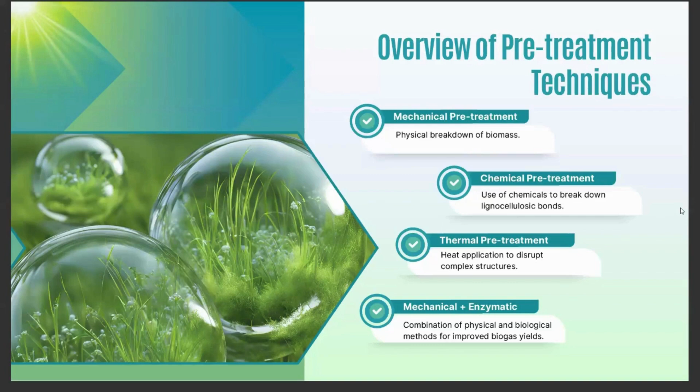For pre-treatment, there are multiple ways we can pre-treat Napier grass - one is mechanical, second is chemical, third is thermal. All these were already explained by the earlier co-panelists. Since I don't have much exposure to chemical and thermal treatment, I just follow mechanical pretreatment followed by enzymatic pretreatment. Today I will discuss only the mechanical and enzymatic treatment to save time for all the viewers and co-panelists. Please, next slide.

In mechanical treatment, we break down the size of the particles. So it is again clear that the lesser the particle size, the more the biogas production.

When we thought of pre-treatment of Napier grass, we looked at nature. We looked at how a cow can digest the grass, and we tried to copy it. We have not done something miraculous or invented something miraculous. We just looked at the cow and tried to copy how it digests grass or any agricultural waste. What the cow does is, we all know cows have multi-gastric stomachs.

When it grazes in the farming land, it chews in very big sizes and tries to finish its meal in very little time, keeping it in one compartment of its stomach. When it comes back to the resting period in the farm, it recalls it, chews it into fine particles, and at the same time mixes in saliva, which is nothing but a natural enzyme that can digest the Napier grass. This is the same thing we followed here to digest the Napier grass.

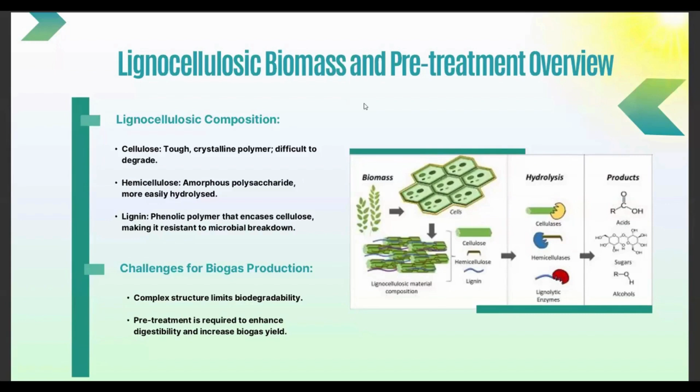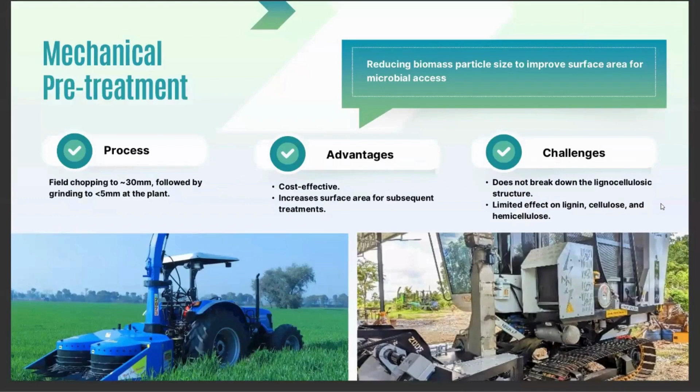These are the mechanical equipments we have invented over the period of time in India. This one is the first one, invented at our factory in Punjab. The second one is what we are importing from Thailand, for initial days only 5 pieces, and the rest can be manufactured here in India with their collaboration to bring down the imported cost. So the process is field chopping to less than 30 mm size.

Then at the CBG plant, a second milling brings the biomass down to less than 5 mm size. The advantage is it is a very cost-effective solution, and it increases the surface area for the subsequent treatment of enzyme and the bacterial consortium.

There are certain challenges. The mechanical treatment does not break down the lignocellulosic structure of the biomass; that needs to be taken care of by adding the enzymes. There is limited effect on lignin, cellulose, and hemicellulose. So mechanical treatment is not for treating lignin, cellulose, or hemicellulose, that's what I meant.

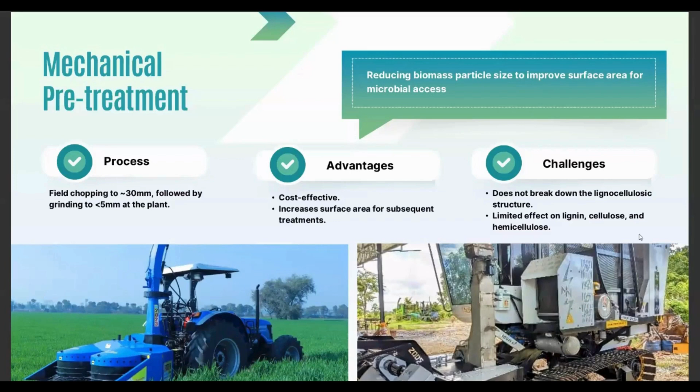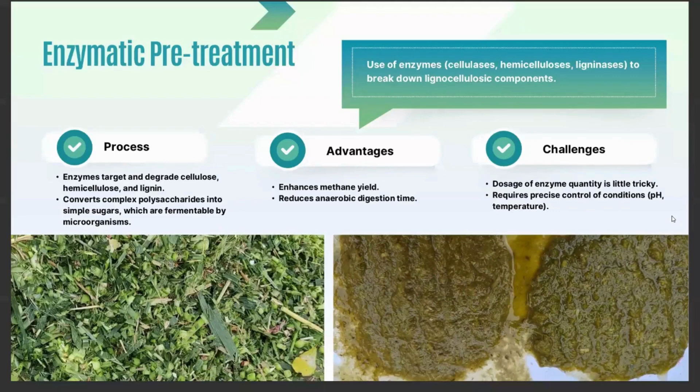In the first picture on the left hand side, you can see what we bring or do at the farm level. The particle size is chopped at the farm level using the mechanical equipment shown in the last slide, from 1 to 30 mm size. Then when we bring it to the CBG plant, shown in the extreme right side slide.

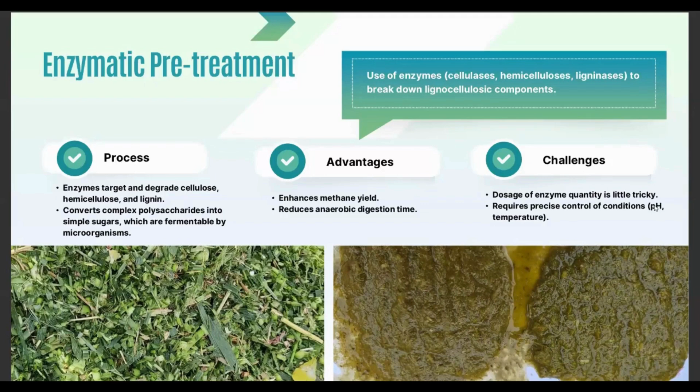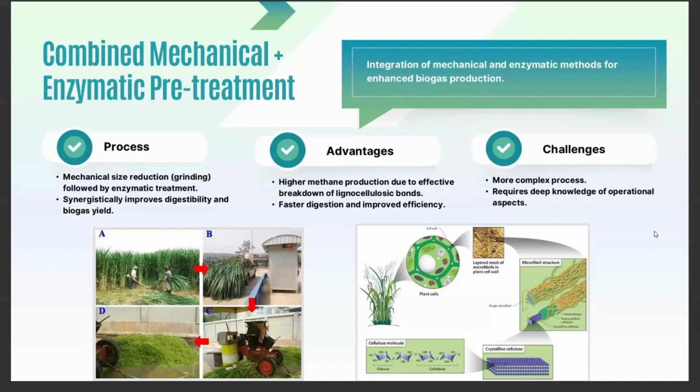The advantages and challenges I also discussed in the last slide. Next, please.

So here I explain the detailed process flow. Step one is mechanical chopping of Napier grass in the field up to 30 mm size. Second stage is to transport that chopped grass to the processing facility, meaning the CBG plant. Third step is the second mechanical treatment, meaning grinding or milling it to bring the size down to less than 5 mm, which increases the surface area exponentially.

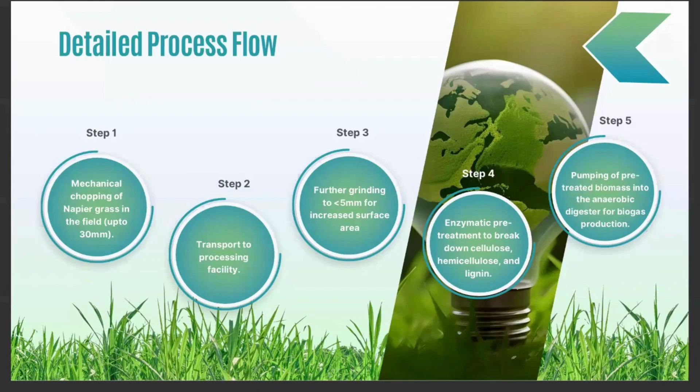Step 4 is we add some enzyme and let it sit for 72 to 96 hours for hydrolysis, so that the cellulose, hemicellulose, and certain part of lignin can be degraded. Then we pump this sugar syrup kind of material into anaerobic digestion for the bacteria to consume. So this is the process. Next, please.

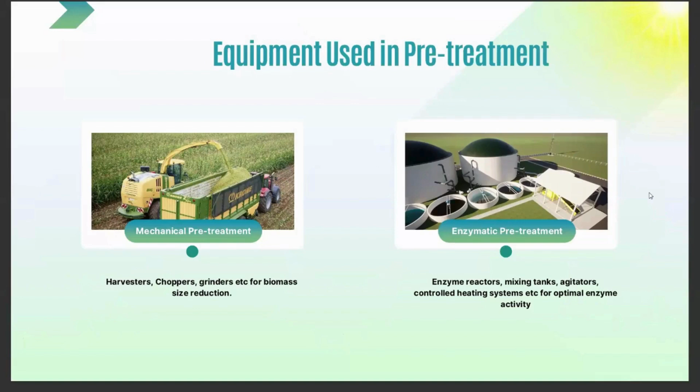So again, these are some pictures. In the first picture, this is the European solution. We created a miniature version of the same in India that suits or fits the Indian farming land parcel sizes. The second one is the pre-treatment - we need 3 to 4 pre-treatment tanks for the enzyme to act fully in the hydrolysis process. Next, please.

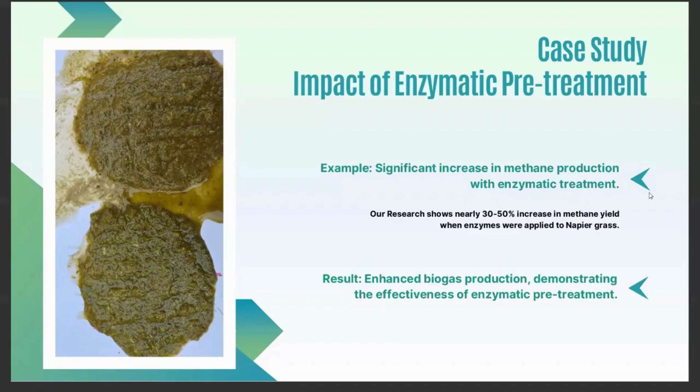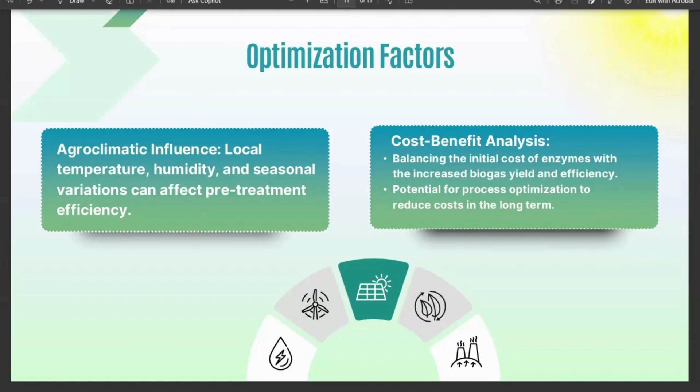Suppose in certain areas there is an elongated rainy season. In that case, harvesting may not be possible in the farm, so the pre-treatment can be affected. But we have come up with a silaging facility to overcome this challenge.

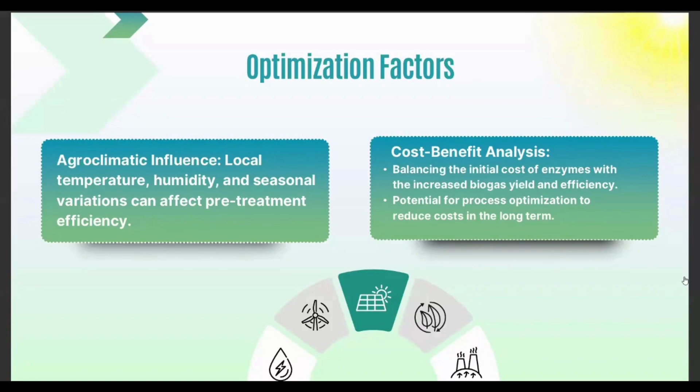Cost benefit analysis - balancing the initial cost of enzyme with the increased biogas yield and efficiency. Suppose if we are spending 1 rupee for the enzymatic treatment, we are getting at least 3 rupees from the enhanced biogas production. So it is always beneficial to add enzyme in the pre-treatment.

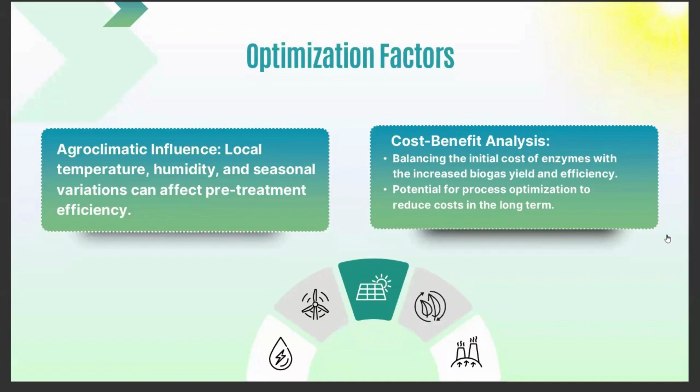Again, there's potential for process optimization to reduce cost in the long term. So agitator life and everything will increase because it consumes less power and less stress. Next, please.

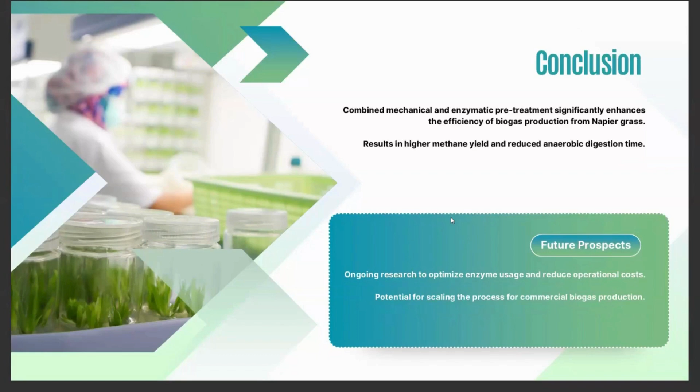So we are continuing with our R&D facility to enhance this process, again trying to reduce the HRT time so that we can have lesser CAPEX and lesser OPEX. Moving on, we have Mr. Atul and Mr. Abhimanyu of Primo Engineering for special focus on pre-treatment of feedstock.

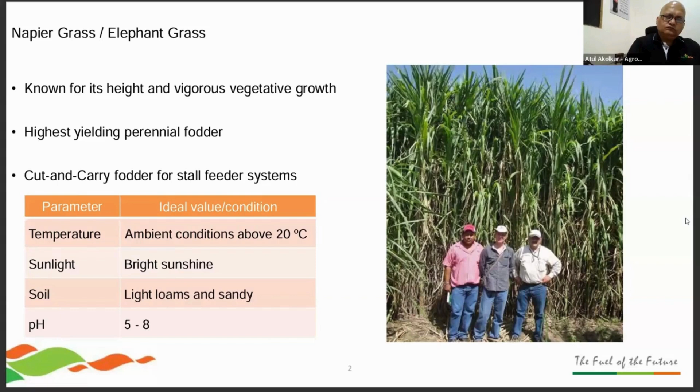Coming to our topic of Napier grass, I believe it has already been covered, but just to give you a quick idea of what Napier grass is: it's known for its height, vigorous vegetative growth, as it's a grass, very high yielding perennial fodder, and a very simple cut and carry type of fodder for stall feeder systems for livestock. The ideal parameters for the growth of Napier grass are shown here, and it should be evident that it's a resilient crop that can grow in any part of India, as we are well aware by now.

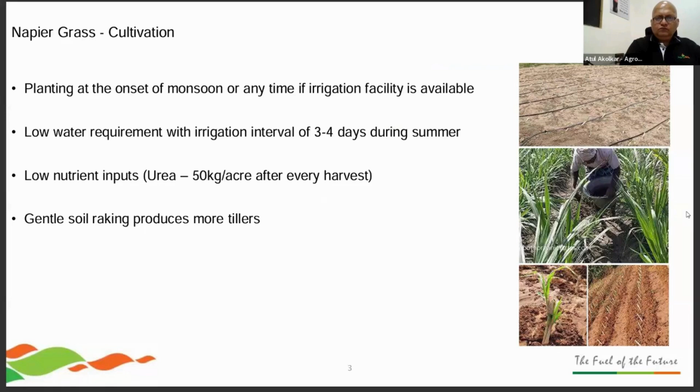A few points on the cultivation of this grass. Planting can be done at the onset of monsoon or any time of the year if ample irrigation facility is available. It has a comparatively low water requirement, with an irrigation interval of around 3 to 4 days during summer. Low nutrient inputs are required, and if you're talking about a circular model, you will be able to use the FOM coming from CBG plants as well to improve the harvest.

As has already been talked about by the previous panelists, harvesting can be done in short intervals of around 4 months. We estimate we can get around 60 to 70 metric tons of wet Napier grass, with around 80% moisture, per acre per harvest. That translates to around 180 to 210 metric tons of wet Napier grass per acre per year.

The average total solid content or dry matter in this grass is around 20%. To the right, we have a proximate analysis of dry Napier grass. We can clearly see that the ash and lignin percentage is quite low, we have higher protein content, and because of the higher cellulose and hemicellulose, it translates to higher digestibility, making it a very good and ideal energy crop for CBG generation.

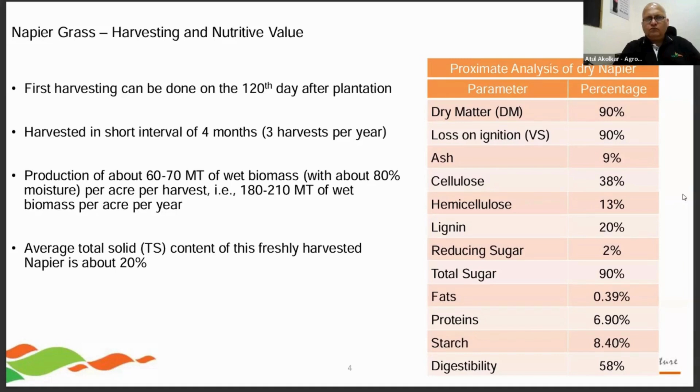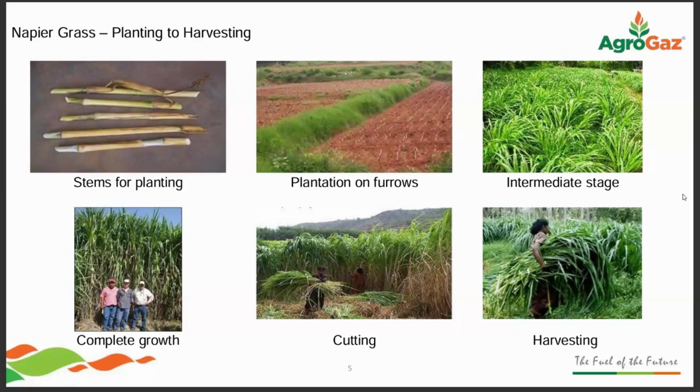Next slide, please. Mr. Patil had already shown us some images, so we also wanted to bring the ground realities of the farm to you. I believe this next topic has been covered in quite detail by the previous panelists, so we just thought to touch upon it briefly with this slide, and we can skip the following one as well.

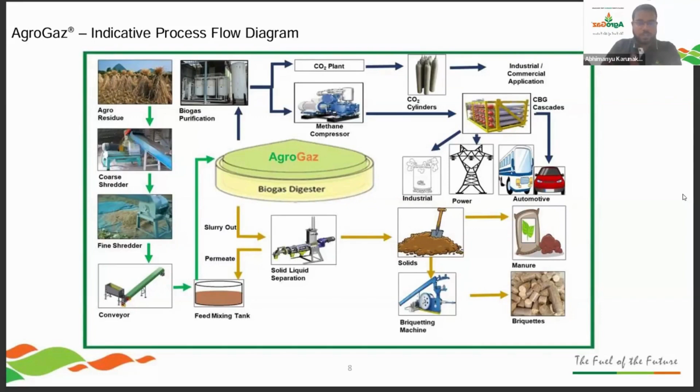I believe the overall process flow diagram is the same as what has been shown before. We are mechanically shredding the biomass, which is the only form of pre-treatment we carry out. Once the process explained by Mr. Atul is carried out inside the digester, the downstream processes are again quite similar. This next slide is one we would like to focus upon.

It was a good idea to understand how Napier grass is grown, the biology behind pre-treatment, and the other topics discussed by the panelists. But coming to the crux of the matter, what do we do with it? How do we make an economical project? How do we make it green, not just in terms of environmental sustainability, but in terms of commercial feasibility?

Most of our plants are in the range of 10 ton per day CBG generation capacity. For 10 tons of CBG, we have calculated a requirement of 400 tons of wet Napier grass with 80% moisture. This translates to about 80 tons of dry matter, from which we are able to generate 10 tons of CBG, which is a very high yield of 12.5% on dry matter basis.

The secondary product we get along with it is briquettes, or green coal, which has a good calorific value and can be substituted in thermal power plants. Apart from briquettes, we have another secondary product, that is carbon dioxide. For this calculation, we have not included the CAPEX required for CO2 liquefaction, and neither have we considered the sales from CO2.